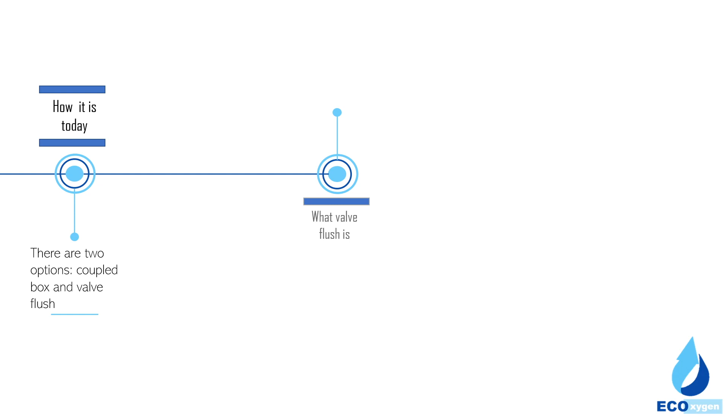Nowadays, there are two options: coupled box and valve flush. The last one is installed in the middle of a pipe on the wall connected to the water tank, and the other installed directly in the toilet. Our product is based on the principle of Venturi and a square-edged orifice. A Venturi is a device that increases the speed and reduces pressure, and the square-edged orifice is a flow meter that allows reduction of the flow section.

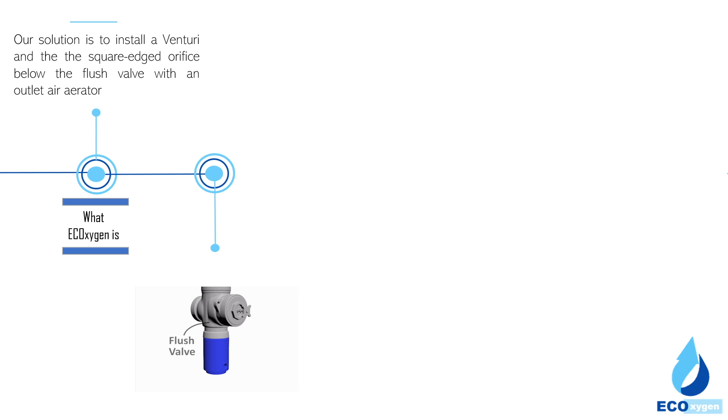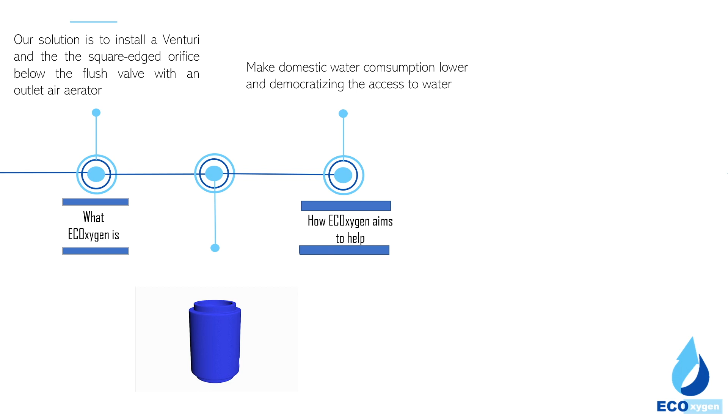Our solution is to install a Venturi and a square-edged orifice below the valve discharge with an outlet air aerator. That way the low pressure will suck the atmospheric air into the pipe, transforming the water discharge in a mix of water plus air, thus making water consumption lower without losing the effectiveness.

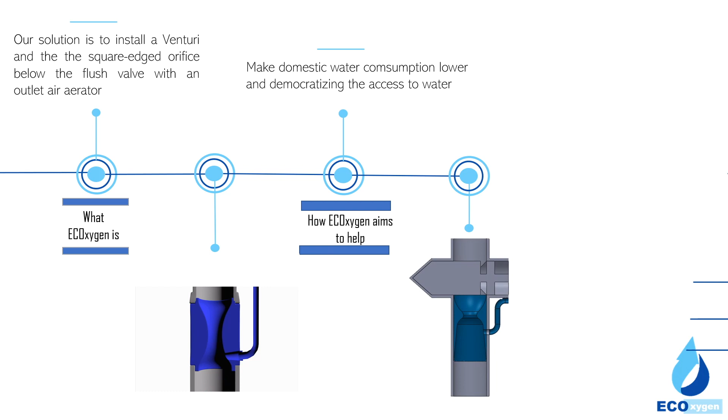To validate our idea, we performed the tests in Facens hydraulic lab, calculating the flow and pressure in pipes simulating normal discharge and a discharge with the square-edged orifice and Venturi. So we conclude that the decrease of the flow with the use of ECOxygen is compensated by the pressure that the Venturi and the orifice plate provides.

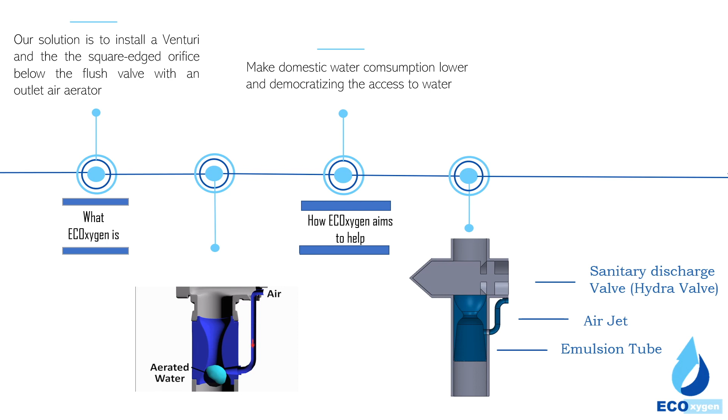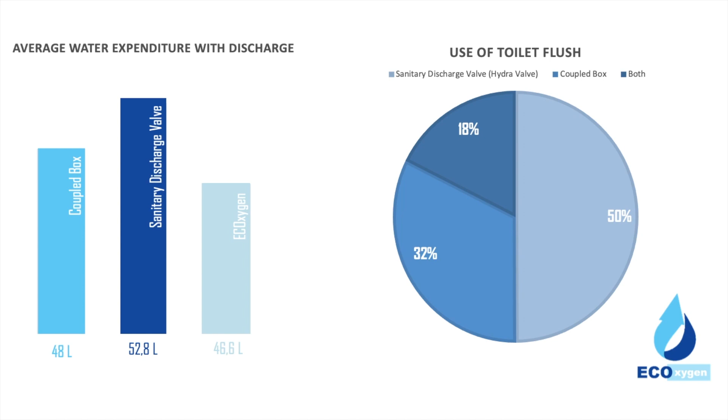We calculate the average water expenditure with discharge for a family per day. In this graph, we compared three types of discharge. It is important to note that the ECOxygen represents savings of 11.5% of water over the normal discharge valve. The second chart represents a survey conducted with the community of our university, and the numbers represent the percentage of using the normal discharge valve, coupled box, or both in their houses.

We believe that our decisions influence directly the future of the world. So we determine as principle the democratic access of our product. Therefore, we intend to develop aiming the low production cost, easy installation, and bring real gains to the client. In ECOxygen, we are very proud to say that in the planning, we achieved all of the purposes.

So, in order to make the product the most affordable as possible, we intend to market it on retail and online sales, hoping to create a relationship between the company and consumers and expand our marketplace and our network. We created a website which is available all around the world. It is easy to understand and contains the information of the product, the progress of our project, and it enables the user to talk to the developers.

For us, sustainability walks along with accessibility. We have already determined our next steps in this walk. We believe that to achieve our future objectives, we need to focus on marketing, the advantages of ECOxygen should be known, and economic and easy installation. We intend to invest on advertising in the modern media like social network and video platforms, always with the aim of getting more customers.